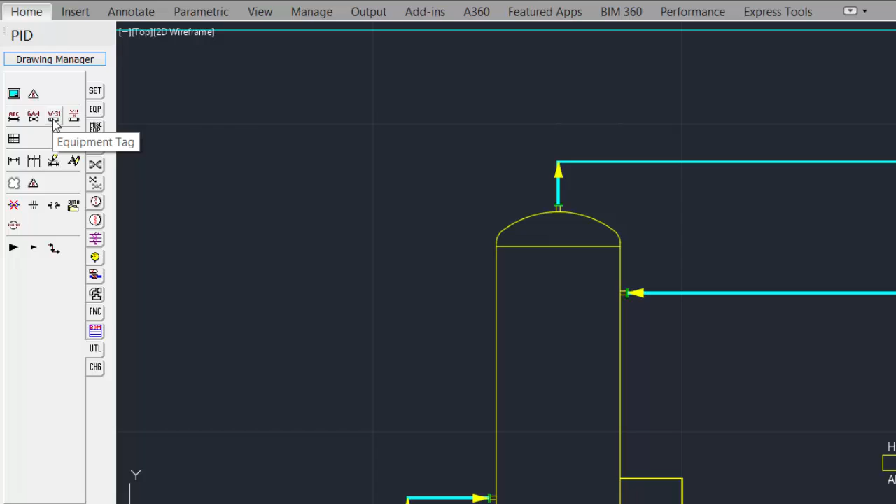On our drawing, we'll zoom up on the vertical vessel and we'll select our tag found under the Utilities tab, and then we'll select Equipment Tag. Select the location of the equipment tag somewhere inside or near the vessel. We can underline and we can place our tag.

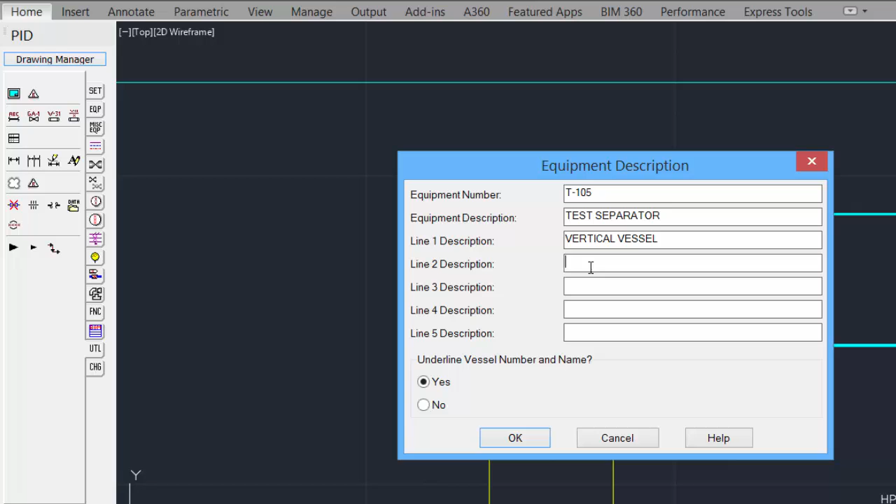To place the equipment descriptor, select the equipment description tool, select somewhere near the top of the drawing, and then add the information for the equipment description, including the equipment number, the equipment description, and any other information that may be required to describe the equipment, such as the name and possibly the size. And the equipment descriptor is placed.

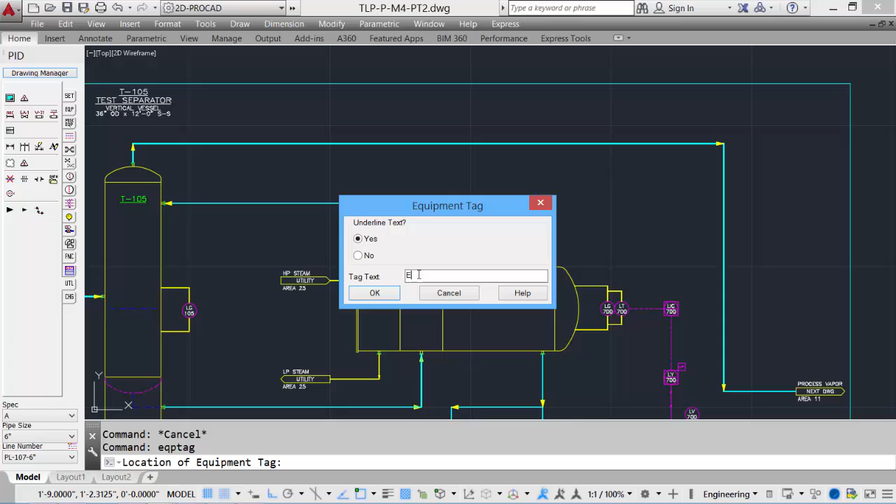Size, font can be set through our Standards Manager. Underneath the drawing parameters, you will see the fonts, the heights, and these can be adjusted as per project specs. Let's finish off the other pieces of equipment. Place another tag for a reboiler, and also the descriptor somewhere near the top, and then fill in the data.

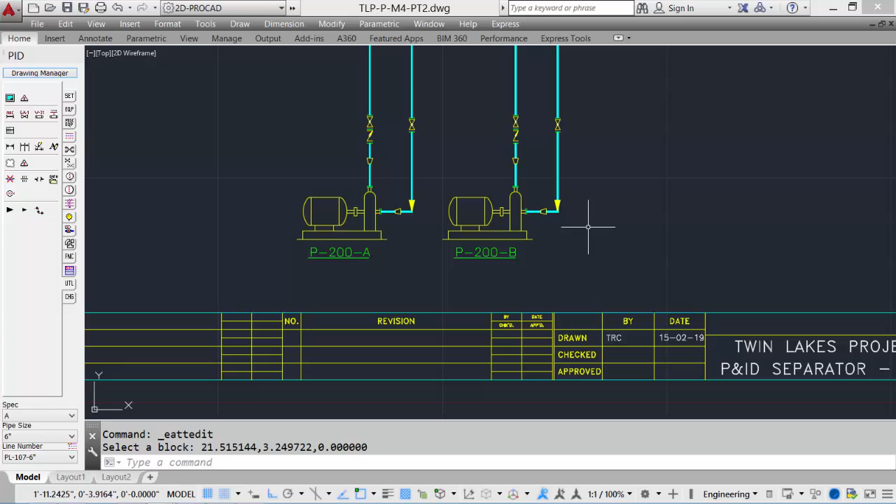And we'll also place the pumps. And we can use AutoCAD's copy command, copy it over, and then double click to edit. And there's our two pump tags. We can then put the descriptor up near the top. And there's our descriptor for our pumps.

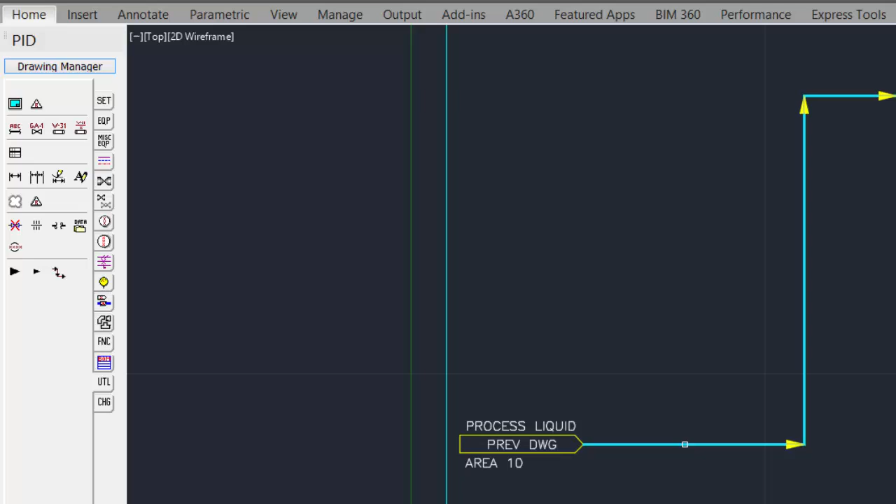The next topic is line numbers and valve tags. Let's zoom up on the left side of the drawing and place a line number on our first process line. On the toolbox, under the Utilities tab, you will find the line number. Select the line number tool. Select the process line where you would like the line number to show up.

Click the line number. A list of the available line numbers for the project are shown. Select the appropriate line number. Click OK, and the line number is placed. Simply do that for each of your lines. Click the tool, select the process line.

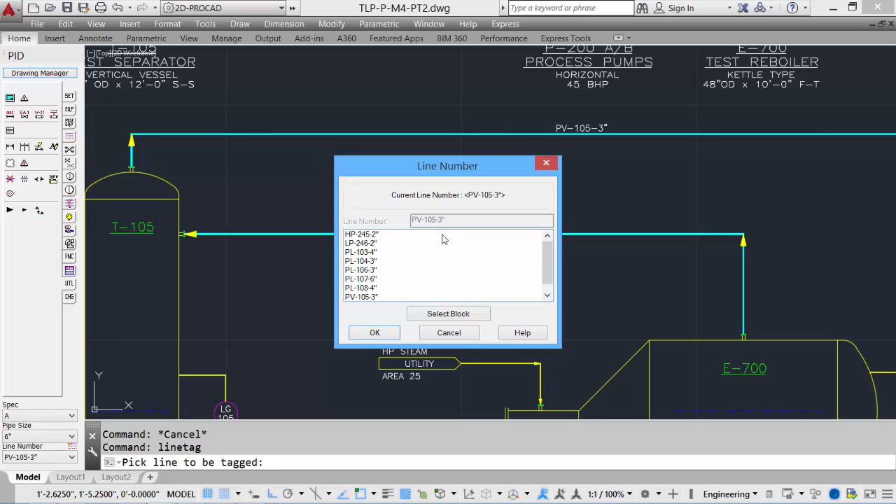Even utility lines can be tagged, simply by picking the line where you would like the tag to show up. On vertical lines, the line tag is placed on the left side of the line. Once all of our line numbers have been placed, we can then take a look at adding the valve tags. Let's zoom up around the pumps to take a look at the valve tags.

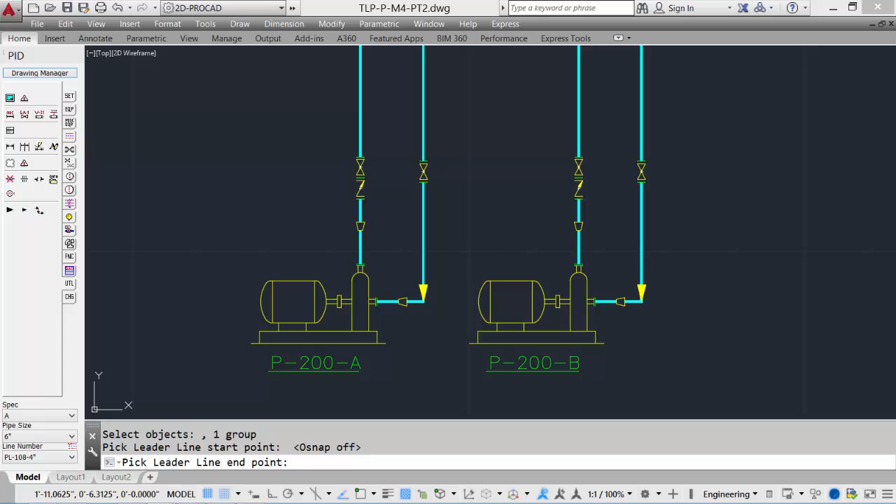For the valve tags, simply go to the Utilities right next to the line number, select the valve. The tag shows up. We can add a leader line if we need, and the valve tag is placed. Let's continue doing that for all of our valves. And these tags can be moved using AutoCAD's Move command.

The next topic is regular text placement. When there isn't a tool available, we can use AutoCAD's text command to place text information. Let's zoom up on the vertical vessel and place the normal liquid level text information. Simply use AutoCAD's text command, select the middle point, and then type in the text.

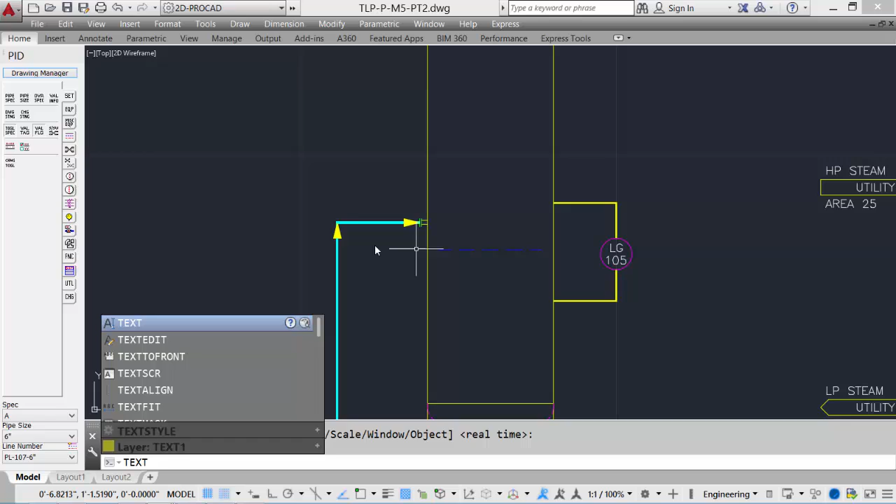Very easy to do. We can also do things like the reducers, which don't have a tool. We can also add the text for those, and we can also use AutoCAD's copy command to duplicate our text. Let's finish off with adding the text for our reducers on our control loop.

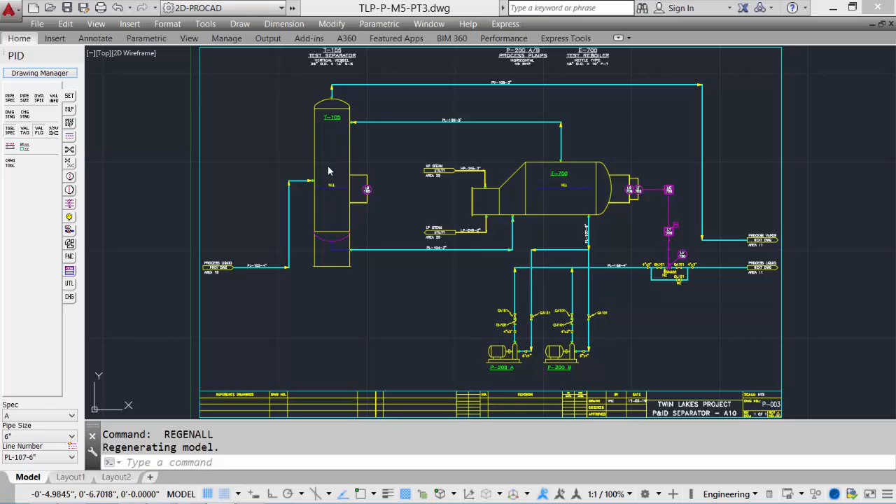The next topic is editing text. At any time during the drawing session, we can edit the text on our border, our pump information, any of our off-page connectors, even our equipment description blocks, even our line numbers, and just regular text. Simply double-click the text information to edit, and the editor will show up.

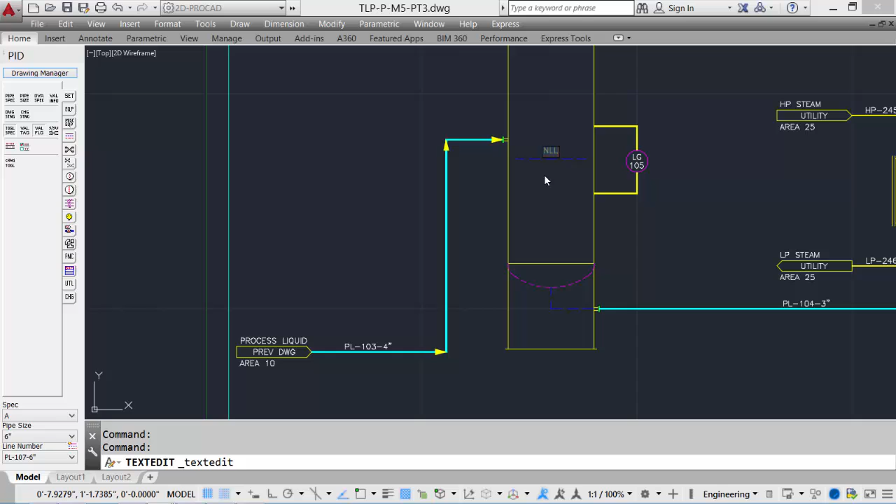You can make changes to it, overrides, simply by clicking on it. Normal text: when you click on it, the normal AutoCAD text editor, and we can adjust the text accordingly. For our border, simply click on the border, double click the border, and the information shows up.

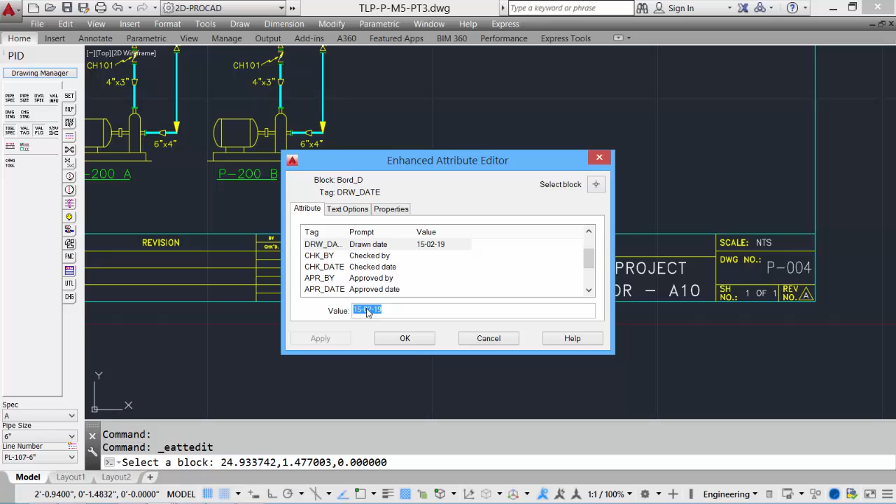A neat trick is you can actually click on the text information you'd like to change, for instance the drawing number, and double click it, and it will show up in the value box. And it will change. Click on the date, it will select the date and allow me to change just that text information.

Another way to edit your text is under the Change tab. Select the Dynamic Attribute Edit, and then select the block. This brings up the Edit Attributes dialog box, whereby we can go in and change it in that format.

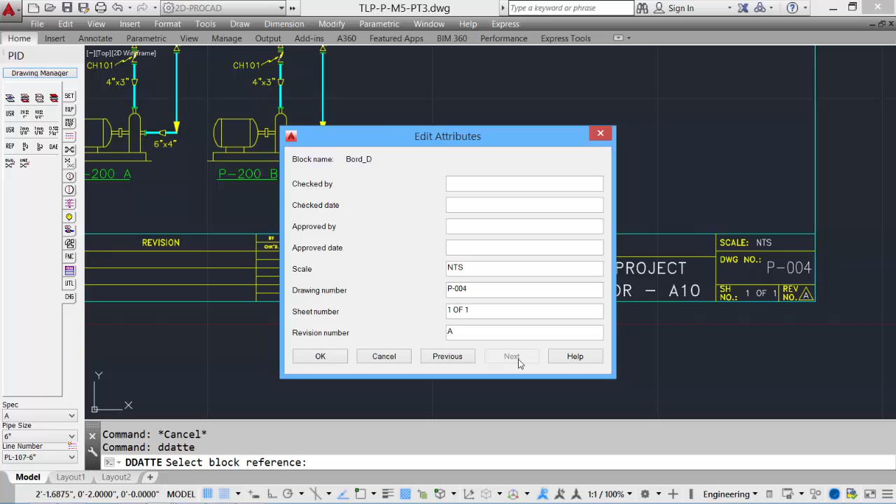The last topic in Module 5 is plotting basics. When a drawing is complete and a plot is required, simply select the Plot tool or type in the Plot command. In the dialog box, to expand, simply click the arrow in the lower right corner to see more or less of the information.

Plotting basics, simple enough. Step 1, select your printer or plotter. In this case, I will select a PDF writer to create a PDF file. Step 2, select your paper size for the available paper size for the plotting device and/or for the PDF file. I'll leave mine at letter.

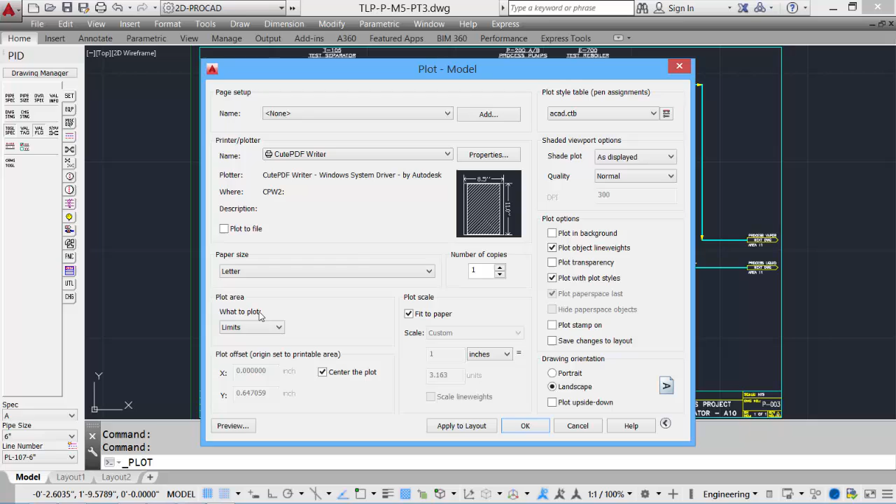The limits, center the plot, and fit to paper, we can leave those as defaults. In order to see a black and white plot, simply change the ACAD, which is the default, to monochrome. All the other options for plot options and drawing orientations can be left at their default values.

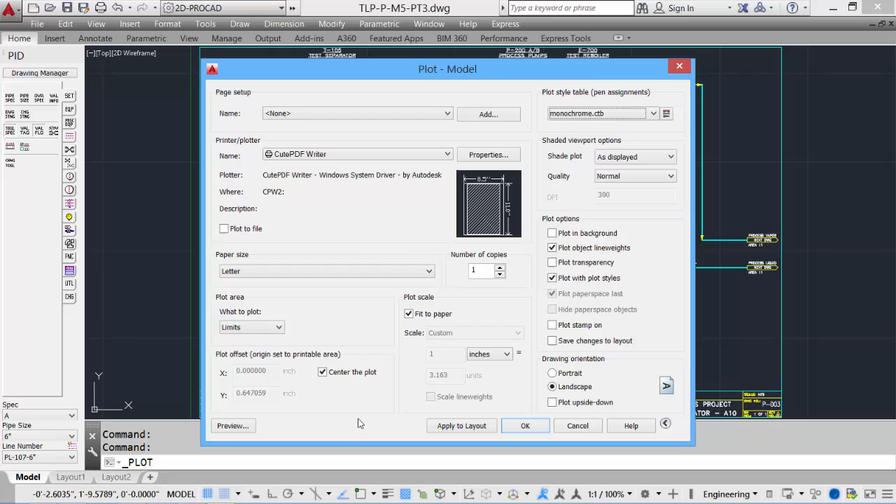It is highly recommended to use the preview of the plot. The white box on the preview is the piece of paper, and then our drawing is shown. If everything looks good, we can close this off. And to remember these settings for the next time I come into this drawing, I can actually apply it to the layout.

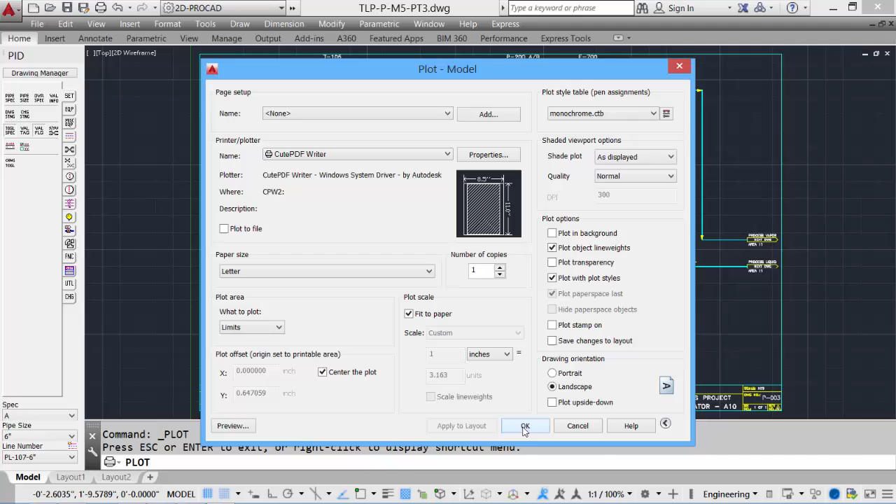Click OK to accept and create the plot. In the Save As dialog, because I'm creating a PDF file, I can adjust the file name. Lastly, save the drawing. This concludes the topics covered in Module 5.